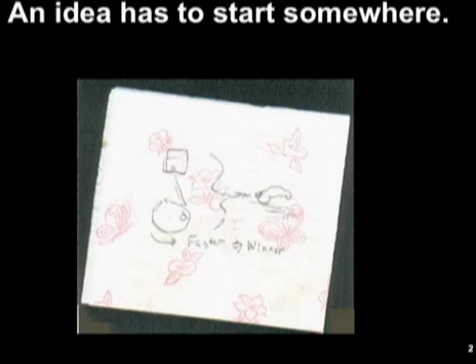An idea has to start somewhere. Second place is the first loser. Be competitive. My best ideas start during a workout or hiking or at dinner. And if you can see it, it's a napkin and it's in your handout as well. Or just drawing a little something, because I don't go to bed, I don't go hiking. Other than being in a swimming pool, I have paper and pencil with me.

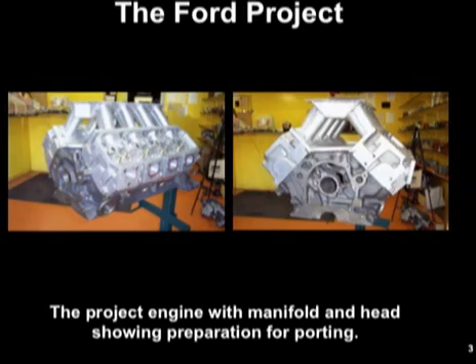I also like to give the answers first, because that allows you to know where I'm going through the process of these thoughts. It'd be very hard to remember every word. So the finished project is what you see in front of you first. It's my Ford project. About 8 years ago, I started talking about this project here at the conferences. This project was actually finished 7 years ago. So everything you see here now was actually done 7 years ago, and it's still advanced to this day. Project engine, preparation and porting.

Okay. Design the engine for horsepower. And I'm going to qualify my statements here today because each application does take something different. These are for single four-barrel, at sea level, maximum performance engines. I will try to qualify my statements when I can, and remember to do so. The place to start.

Well, one of the things that I've learned from working with the Cup teams and myself is we can have a pretty good indication of how much air we need by the estimation of power or measured power. So I made up a little formula. Some of these are just John things, but I thought this is a time to share them with everybody. We have horsepower, an 8-cylinder in this case, and the number that I use as a multiplier is 1.24. So I take the horsepower, and here's an example. 750 times 1.24, and you'll be within a couple CFM of 930. So when somebody tells me how much power they're making, I can tell you how much air you're taking.

All right? If somebody's got a big secret and they don't want me to know something, I just ask them one question or the other question. I work with a lot of Cup teams on plate motors. They tell me the power. I can tell you the air. I've never missed it more than 1 or 2 CFM. So we're going to go through this formula because it's a very helpful formula.

Okay, you take CFM times 12 to get square inches. Back to the example again. We have 930 CFM times 12 gives us 11,160 square feet per minute. Now we've got square feet per minute divided by 60 gets square feet per second. Example: 11,160 square feet per minute divided by 60 gives you 186 square feet per second.

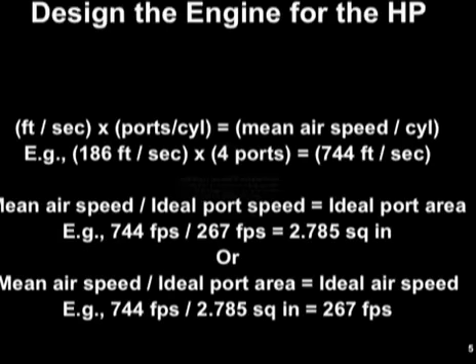So if you're developing this particular thing, the object is you find a combination that works for you, and you begin to predict your future based on your atmospheric conditions. Once an engine size and a horsepower requirement are determined, then you can calculate port area, RPM range for piston speed, and stroke for piston position. As we said before, you could take the 930 CFM and the ideal VE for your engine application. That'll give you RPM range.

You take RPM range for optimum piston speed for the type of fuel you're running, because it's based on burn rate of fuel. There's no absolute numbers. The thing that I'm trying to do is tell you the concept. If you have methanol, each fuel has a burn rate. But you can change and develop new engine combinations based on what you're most familiar with. Now I can begin to look at valve to bore distance and valve to piston distance.

One of the things I was beginning to think, like John 101: the engine only recognizes its own needs. Flow per crank angle designed around limitations or restrictions. Event timing takes precedence in maximum performance engines. Example, pro stock, because the engine still recognizes flow per crank angle. A pro stock engine is valve restricted. Event timing depends on air density and pressure. Peak velocities may increase or decrease with change in nose area, camshaft.

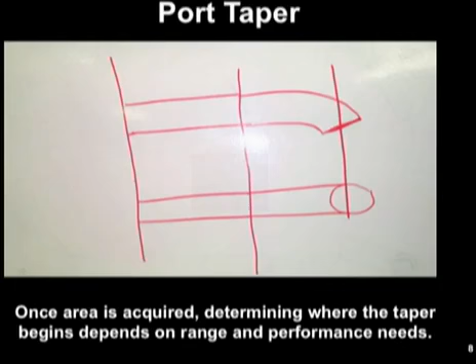Port taper. Once area is acquired, determining where the taper begins depends on range and performance needs. If you're looking at, for instance, a dirt circle, which has tight turns, we usually run a constant area from the bowl to the plenum. I just drew a line here for where the cylinder head separation would normally be. But if you go to the other extreme, pro stock, which is a valve-restricted engine, that taper will begin right at the valve seat, and continue up through the head and up through the plenum.

Now we start to get to some of the drawings. Computer-aided design. AutoCAD helps with corner radiuses and tapers for proper area. If there was time, I would have showed how to make the runner hand forging dies with the corner radiuses. What this allows me to do here is to show you that the area is calculated for both the cylinder head surface and the plenum, and the taper is calculated.

So what we're doing now is developing the process of thought, from writing the first note to realizing that we're going to have a form of racing that we're going to complement and where we're going to begin the taper. In the single 4-barrel applications that I do, I run constant area through the head, and I begin the taper at the mating surface for the engines that I do. Pro stock, I would begin them at the valve seat area.

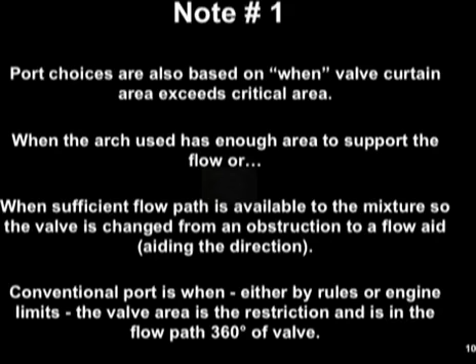Port choices are based on when valve curtain area exceeds critical area, when the arch used has enough area to support the flow, or when sufficient flow path is available to the mixture so that the valve is changed from an obstruction to a flow aid, aiding in the direction. Conventional ports is when, either by rules or engine limits, the valve area is restricted and it is in the flow path 360 degrees of valve.

Well, one of the things I wanted to begin to do is thinking like a droplet. When I was first doing a lot of porting, I used to think like air. And I realized at some point that you really do have the fuel. So you got physical limits and port location over bore, which determines droplet path. Yes, this is a lot of thinking. I wrote that on my own note here, because when you're looking at these examples, I drew them by hand because I was trying to make them representative.

A lot of times, depending on where the port enters the bore, you can have a different pathway, a drop pathway. And I did this simply at the time, and I thought it was a really good effort. I took a piece of tape, giving a droplet a headache. The flow component, the piston, can help or hurt droplet motion. Short strokes like directional ports.

And when I put that tape in that same drawing and took the photograph again, one could begin to see that in some cases we could have a head that flowed very well on the flow bench, but once it got onto the engine, it didn't respond as well because the droplet path now became a problem right here. So that's why before we start doing anything, we start thinking.

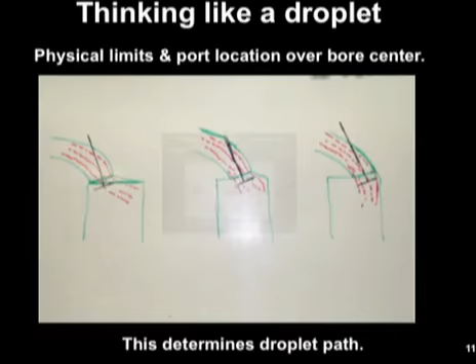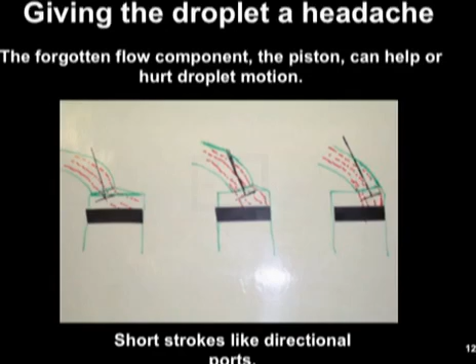The next photograph, we simply move the tape down, removing the headache. Long strokes like conventional ports. Because now you can take the same thing here, and if we go back to the last slide again, you'll see that that port that was running into the piston, because it would have been a short stroke, is now an enhanced design for the droplet.

Making the droplet comfortable. Port orientation can help or hurt droplet path. Down on the bottom here is when you're looking at the orientation from the vertical appearance. You can have a Ford port, demonstrated in the black, or a Dart Buick in the red, and then you go down to a conventional Chevy, and then over to what they would call short port style Pro Stock port, all giving the droplet orientation. This is before we've done anything. We're beginning to get these concepts.

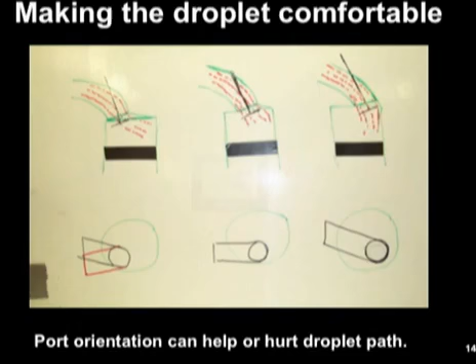When I'm out jogging, biking, or hiking, I'm realizing what my ultimate goal is.

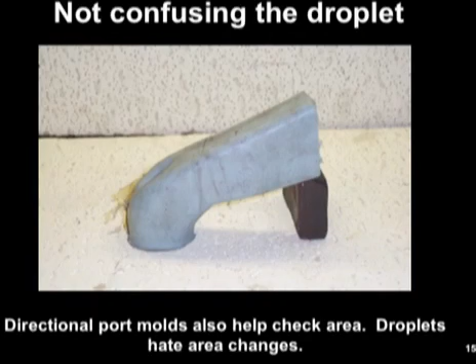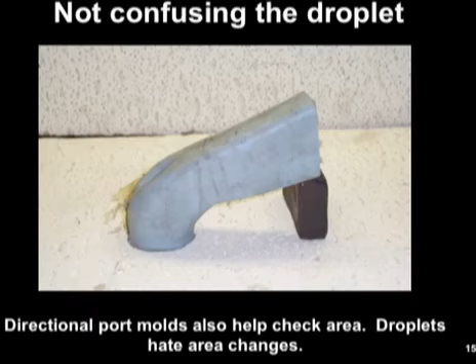Not confusing the droplet. Directional port molds help also check area. Droplets hate area changes. So after we get our basic ideas started, we begin to know that we don't want the area to change. And before I started running molds, I didn't realize that you could make a port flow pretty good, and you take it out and it looked horrible, enough so that you would visually know that it wouldn't work. Both the long and short turn areas tend to be something you really need to measure in a mold situation.

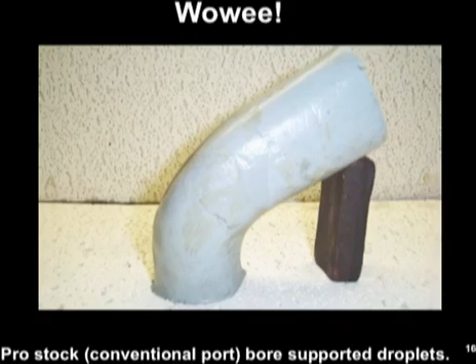This is my favorite, Wowee Pro Stock conventional port. Bore-supported droplets. This is a little hard to see, but this is actually out of a fairly competitive Pro Stock. And if I can go back one, the directional port is configured completely different. And that's just what I wanted you to see: a competitive directional port versus a competitive Pro Stock port, where you're using 360 degrees.